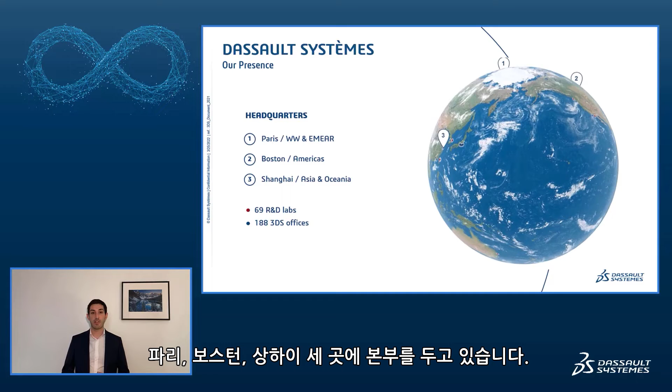So, what is our belief? We think that using the virtual world, using simulations, using science and data is really key to better understand, anticipate, and improve the real world. That's what we believe in, and that's how we design our solutions.

A little bit of history of Dassault Systèmes. Our legacy is the digitalization of process. When Dassault Systèmes was founded in 1981, we designed parts in 3D. We continued along this engineering, design engineering path. And only 8 years later, we supported the full digital mock-up of an aircraft, the 777 of Boeing.

Then we went further with the digitalization of the manufacturing processes. In 2012, we released the 3D experience platform that goes far beyond the engineering or manufacturing domains. It gathers on a single environment all stakeholders and data to collaborate through cross skills and cross areas. For instance, we created the virtual twin of Singapore.

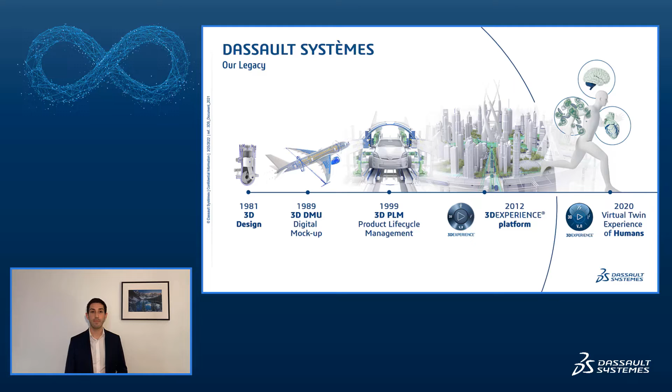So, what is the 3D experience? It's a platform that gathers brands and applications for industries. We do not only focus on aerospace and defense, we work with other industries, and we get knowledge from every industry to transfer and replicate it in other industries.

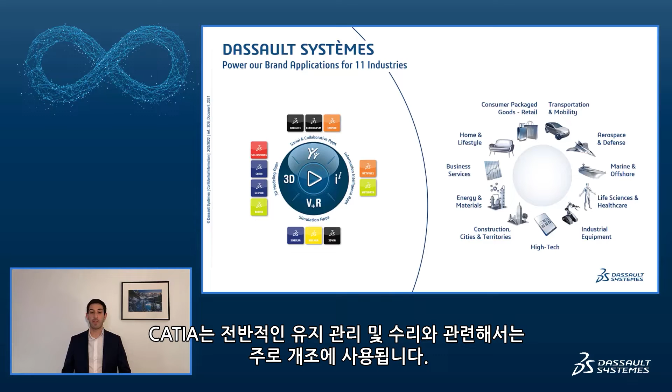In terms of brands and solutions, you probably know CATIA for design. If we talk about maintenance, repair, and overhaul, it is mostly used for retrofit, for instance. Here is a quick overview, a sample of some of our customers.

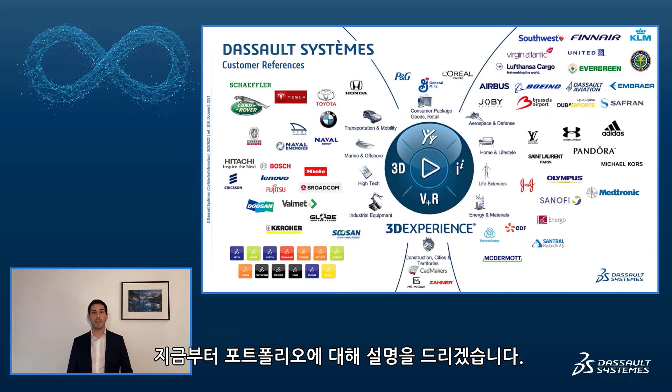So I was talking about Keep Them Operating. It's part of our global portfolio, and it focuses on the main domain of support and service aftermarket, starting from the OEM with the service item, the definition of the spare parts, the definition of the maintenance tasks. Then it goes to the maintenance planning and the maintenance execution with the airlines or with the armies, with MRO operators, to keep the aircraft and its systems operating.

So, what are the different challenges? What are the different trends for the aerospace and defense industry today? Among the different challenges for this industry, with Keep Them Operating, we focus on 4 key challenges. First is the spare part market. This drives, for the time being, a lot of cost and inventory, but there is also a lot of opportunity to reduce this and increase the margin in this domain.

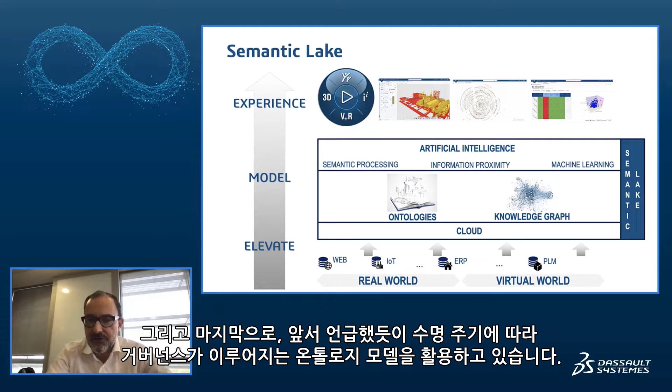On the collaboration piece, let's make a long story short. We want to eliminate all of the traditional disconnected collaboration methods - whether this is emails, spreadsheets, post-its on a whiteboard, or a to-do list. We have implemented into the 3D Experience platform a very large set of collaboration methods to serve various purposes, from governed collaboration with milestones and gates because you have certifications, to highly unstructured collaboration methods with digital post-its, to empower the way to connect all of the users you have within your organization or outside of it to solve specific problems.

If I go back to the core topic of the day, which is how do we maintain aircraft - obviously, if we want to maintain an aircraft, we need to know how it was designed, how it was manufactured, how it was operated, how it behaved, and eventually, for the purpose of which mission. Obviously, when we mention this is a challenge, many...

Companies or people start to believe that the right thing to do is to build a data lake, because indeed you need data coming from multiple systems, so the data lake looks interesting. But in reality, the data lake is a good first step because it allows putting all of the data in one place.

But it doesn't solve the problem because it doesn't give you a projection system. It doesn't give you a taxonomy. It doesn't help you do correlation, segregation, contextualization. So it's not an enabler for solving the complexity of the problem you have to solve to operate a fleet.

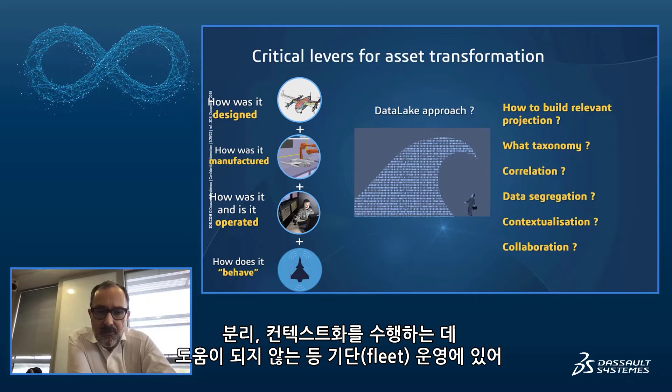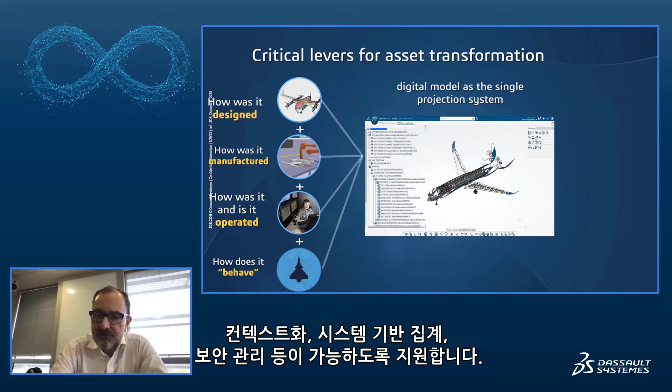In our belief, and this is what I said earlier with virtual twin experience, the digital model is by nature the most interesting representation to project and contextualize the data. So it's not about collecting the data and putting it into one single store. It's about projecting that data onto a referential, and the digital model of the aircraft is by far the most relevant referential that will allow contextualization, system-based segregation, security management, and so on.

But not only that, but then when you do that, you need to look at the data from different angles. You need to look at it from the angle of the fleet, because you want to optimize the availability of the fleet. You want to look at it from the availability of each individual aircraft, or from the availability of specific equipment. Not only that, but the fact is, to solve challenges and issues, you need to empower, enable collaboration, trigger collaboration between the organizations that may be everywhere, that are doing the engines, or that are doing the systems or the missiles, and so on.

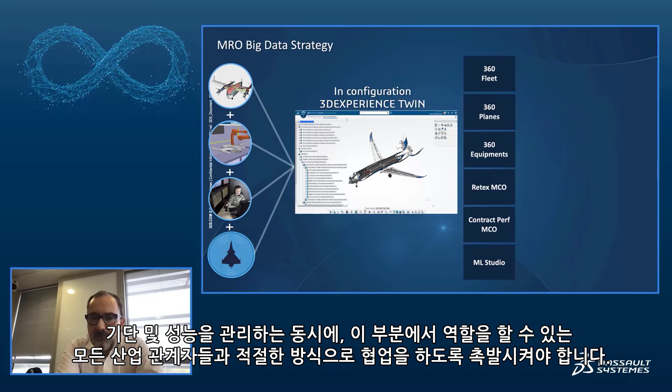So when I mentioned virtual twin experience is at the core of everything, that's a good potential illustration. Connect the whole of the data into the virtual model of the aircraft around specific data analytics and data investigation application to manage fleets and performance, while triggering the relevant collaboration methods with all of the industrial players that may have a role in this play.

I will let the rest of my team get you more details on how this actually works. Thank you.

Thanks, Morgan, for this introduction. Now let's see what are the key challenges for the maintenance of aircrafts in operation.

The major goal is to ensure the digital continuity across the extended enterprise. We have on the right-hand side what we call the real data. This data is coming from the plane, from the maintenance teams which are producing reports during the maintenance and repair activities. And all this real life data has to be mapped on the virtual twin in order to take advantage of all the information coming from the design and the engineering.

This product lifecycle management will help the teams to perform better during the maintenance activities. And this will be done thanks to the virtual twin by mapping real life data on the asset definition of the systems. Now, to improve the overall availability of assets in operation, there are different parameters that have to be taken into consideration.

The fleet availability can be seen as a breakdown between many parameters. The first one, and an important one, is what we call the long feedback loop.

This will consist in analyzing all the defects coming from the different systems and planes and see if we can find any commonalities that might help to say if this problem has been identified to be neutralized using the failure mode and effects analysis, or if it's a new problem that might need to be solved for the future generation of assets thanks to a design and engineering change.

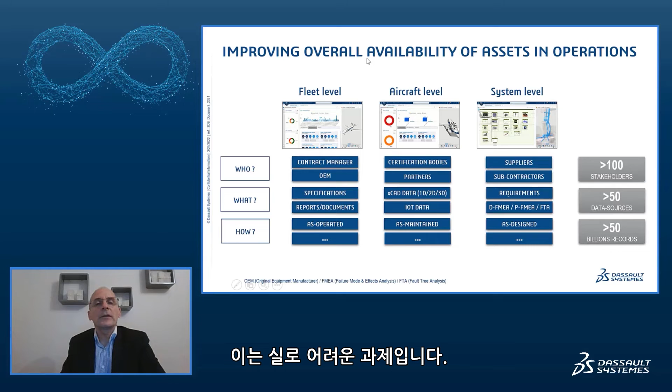And this, of course, when you look at the amount of data it represents, including the IoT, you have to crawl across more than 50, or more than 50 billion records. So that's really the challenge. So how are we doing that?

You will have multiple types of data sources, structured and unstructured, that you have to connect together. This is done thanks to what we call a knowledge graph, in which you have the ability to define links between the systems, capturing the event that is coming from the field, and then building relationships that help you understand how to get to the root cause.

This works because you will stepwise have to analyze different data in different systems, giving you information for different disciplines at different moments. And thanks to these different links that you can build and bridge together, it helps you drive your investigation better and faster.

So this information, now that we have captured it and made it available in one unified model, what we call the knowledge graph, which abstracts the complexity of the different IT systems, we then build on top of that what we call an ontology layer.

It means that at different moments and in different disciplines, different people might talk about the same thing but with different wording. And in the end, if you want to be able to apply rules and do investigation, it's important to have a common understanding of the different meanings you have.

This ontology layer helps build this foundation, on top of which you can implement what we call the data sciences, which are the models performed to train and detect weaknesses in the signals, or find commonalities between problems.

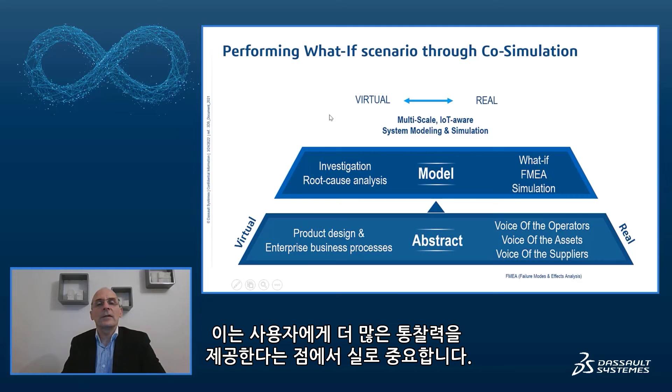In addition, we provide the capability to take advantage of real-life data and map critical systems into the simulation applications on the virtual part of our digital twin, which helps to see if what happened in reality was expected thanks to the simulation, or if we can use the simulation to explain why we had a difference in reality. This really brings a lot more insight to the users.

For simulation, we have a subset of different technologies that help make simulation at different levels. That can be at the micro level, like molecules or nano. And we also have other types of simulation capability that can all be connected together in order to make a system, which can be an equipment with mechatronics capabilities.

And if you go further, you can really build a system of systems that can help you really understand, in virtual, what is happening.

This capability really helps the team represent on the virtual model complex things that you cannot understand if you don't see them, or you can use the model to reproduce and make visible phenomena that are hidden just because of the structure of the plant or system, or just because of the nature of the signals.

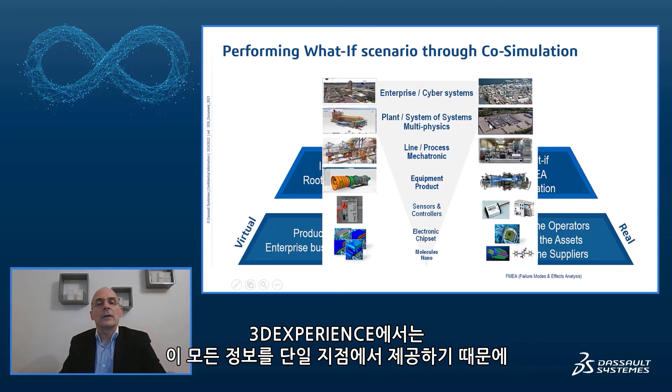Having the ability to bring all this into the 3DEXPERIENCE, available in one single place, with the ability to collect the data, reveal it, and collaborate between the different stakeholders across disciplines, gives you the ability to really improve maintenance and be better in the way you repair and reshape the activities.

Now, let's see in reality how this is happening and how it's implemented. I turn now to Jeremy, who will present a real-life case. Thanks.

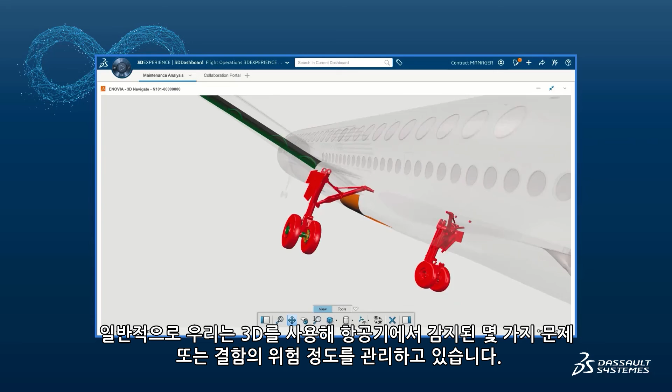We have an overview here of different KPIs on the aircraft equipment or aircraft structure. As usual, we manage the use of the 3D to reveal the criticality of some issues or defects that have been detected on the aircraft, and we can filter these issues by criticality to investigate specific issues.

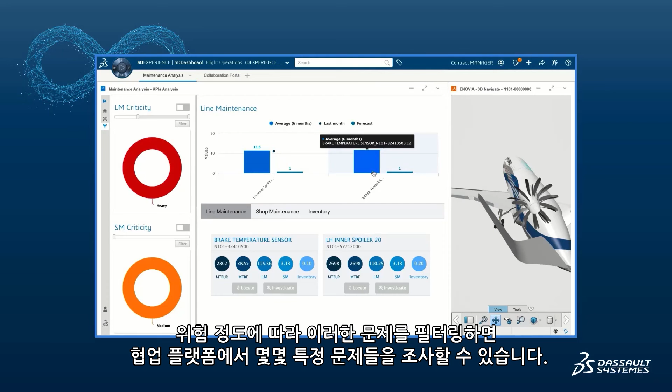As a collaborative platform, we really want to show you here how we manage program management through project planning. So we will assign some tasks to investigate the issues that have been detected on a given aircraft, and to do that, we create some tasks that are now in progress.

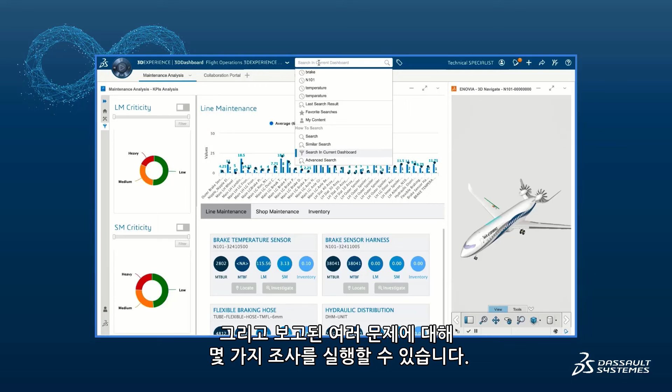So this task has been taken over by the technical specialist, and he will now be able to run some investigation over the different issues that have been reported. Here you have an overview of data collected, and you can locate through the 3D where the issues were detected.

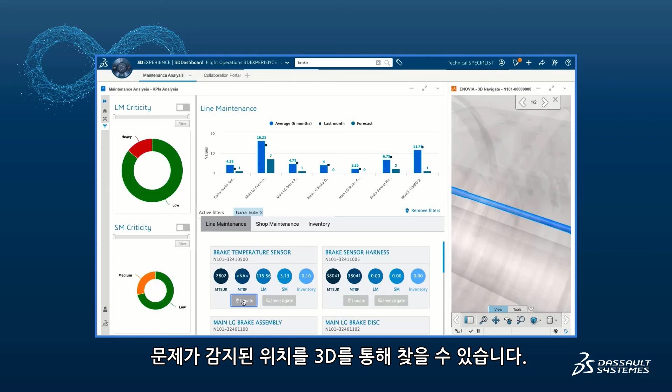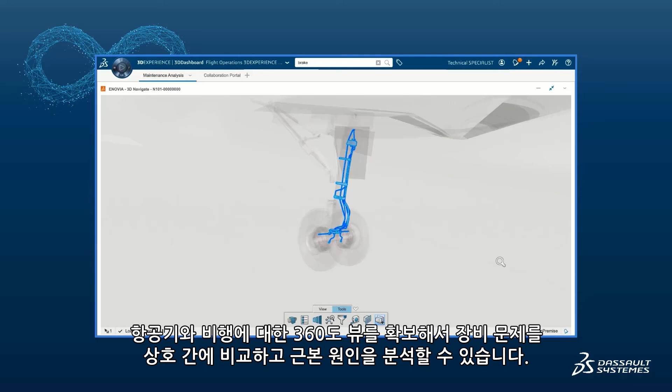In that specific case, we will focus on the brake temperature sensor, and we will run some investigation on the brake temperature sensor data. As we have all the data available in one database, we really get a 360 degree view of an aircraft and its flight in order to compare equipment problems between each other and get the root cause analysis.

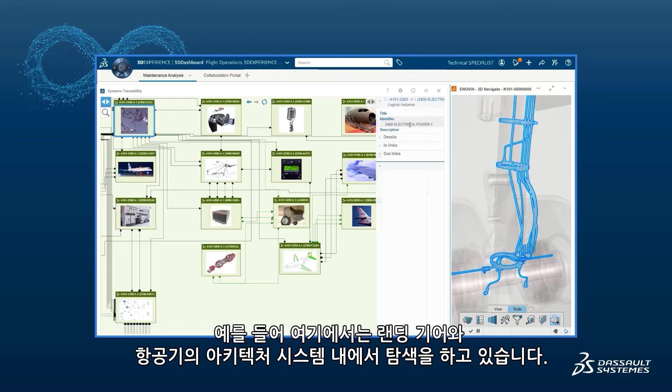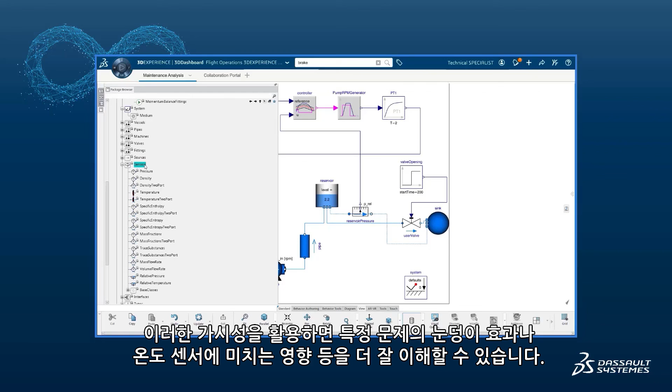We can always navigate and use that cross-domain platform to ensure that we have full visibility of the systems. For example, here we are navigating within the architecture systems of the landing gear and the aircraft. So we can use that to better understand the snowball effect of one specific issue.

How it could impact, in our case, the temperature sensor, and that will help us to investigate through the different data that we have available here. Keep in mind that all the data is either collected from the maintenance shop floor or from the aircraft, and we have both collected and real-time data.

So here we are creating an investigation, and we will run some semantic analysis to be able to understand what happened to the sensor, what was wrong with it.

So we run through the analytics of the fleet. We have the different operations that have been performed on that aircraft, like installation or removal of the sensor during the last maintenance operations. We can integrate this information into our report.

And we can also have a look at a specific aircraft to better understand what happened, what was the in-flight data or the ground speed and altitude, what was the temperature of the brakes at a given moment, so we can understand what happened on the aircraft.